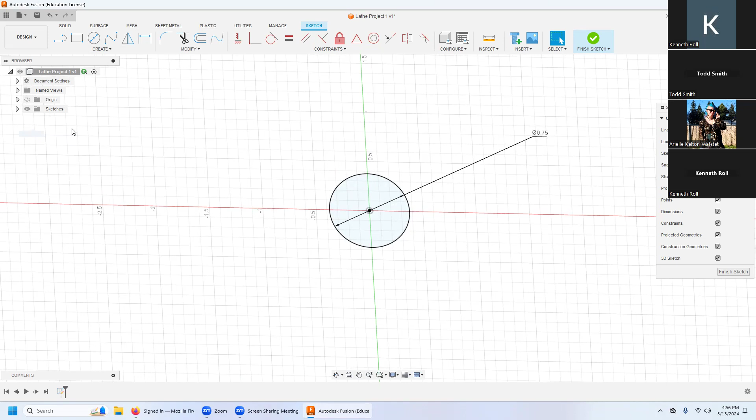Here we go. Okay, so everything is still basically the same. Do we want to go with a 1 inch or 3/4 top? 3/4 top. I will take that answer. All right, and then here we are. And that's going to be our stock diameter. So I might make that one construction. We'll see. Okay, and then I don't like looking down on it square oftentimes, so I tend to like to tip it, just to explain what I was doing there.

And I'm going to go over here and let's say we want to make sure that we turn some of the stock diameter, but we don't want to risk leaving mill scale and such. So I'm going to take some of that down. So if I take that down to a 0.725, that's going to leave about 13 thou per side to get turned on the lathe. That should be enough. Make your own decisions on that.

Okay, and then I'm going to extrude that a distance. I am feeling like an 1/8. So this is going to be the 0.125. This is going to be the flywheel essentially of the top. Okay, then from there, we're going to need something to hold on to for op 2. Op 2 generally has to be more delicate, more careful.

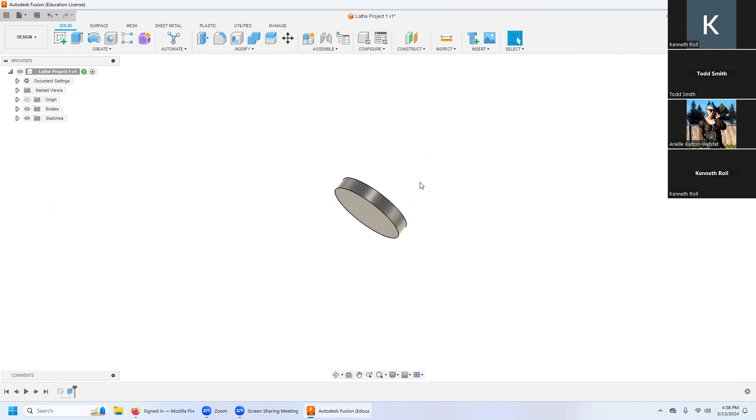So I'm inclined toward putting that grip on the spindle side, the part you grab and turn. So I'm going to say, let's create a sketch, and we're going to create that on the surface here. So that becomes my sketch plane. And I'm going to create a circle there. I'm going to tell it to be a 0.5

diameter. And then I'm going to come up to solids, and I'm going to extrude just that middle ring. I'm going to extrude that out. Let's stay with the 1/8 inch theme, see if we like that or no. There it is. Ta-da. And then I'm going to do it again. And this is going to be the spindle handle, whatever you want to call it.

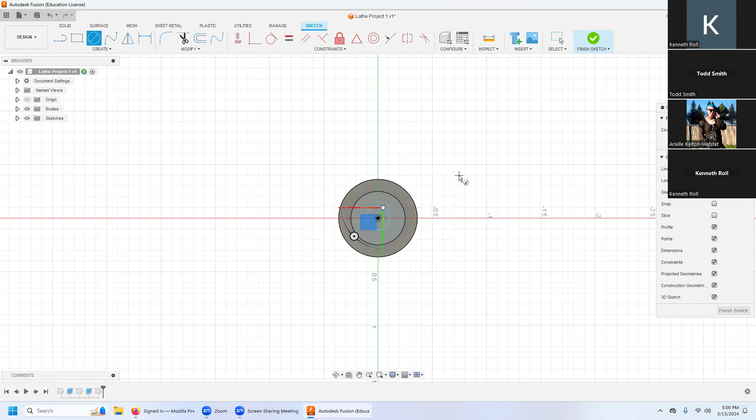And I tend to like when they are 100 thou diameter. But since we're kind of on a 1/8 inch theme, maybe we're going to keep that 1/8 inch. Sure, why not? And then we're going to extrude that out.

And let's look at a 1/2 inch. Sure, why not? We can make changes if we want. Okay, the part that actually touches the table. Let's do that.

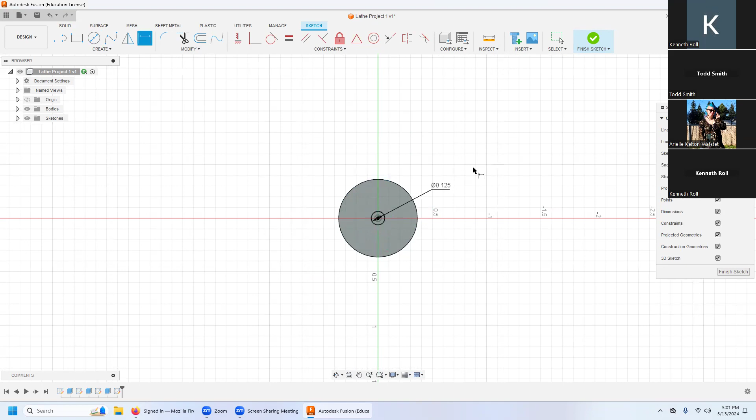There's lots of different ways we can do that. But since we're kind of on that extruding out theme, let's keep going there. So I'm gonna grab that one there. And let's say we're going to make another. All right, fine. Let's keep on the 1/4 inch. Keep going there. Sure. And now I'm going to extrude that out a distance. Let's say 1/4 inch. That might be too far. We'll find out. All right, so there's our basis.

So now we're going to start modifying that. We don't necessarily need to put in fillets down here, but I think oftentimes I like having one that's going to be slightly larger than the tool nose radius of my finish tool, so I can get a nicer finish there. Okay, so I'm going to come up here to fillet. And let's say we have that one and that one be, so we've got a 15 thou tool nose radius. So let's look at a 25 thou, see what that's going to look like. Yeah, okay, let's try that.

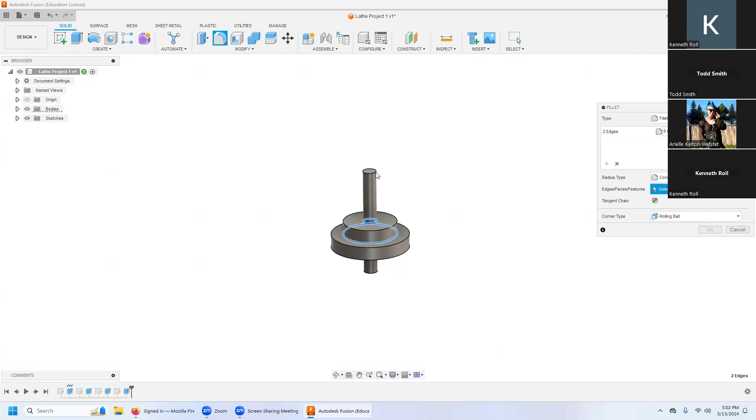And then I want a nice round top here. So let's make that a 0.0625. So it's going to be a sphere. But if we wanted a flat up there, we could shrink that to something, right? Make your own choices. But I think I'm going to go with the 0.0625. Okay. You know what? Maybe I'm going to press Control, and I'm going to add this one down here to do the same thing. So they both have the same round. Yeah, I like that. That's cool.

Okay. What's that? Control. So you can add to your different groupings. I don't know how to remove. Might be just double click on it. But press Control and you can add to these groupings. Selection set, I guess they're calling it. Yeah, I just learned about that.

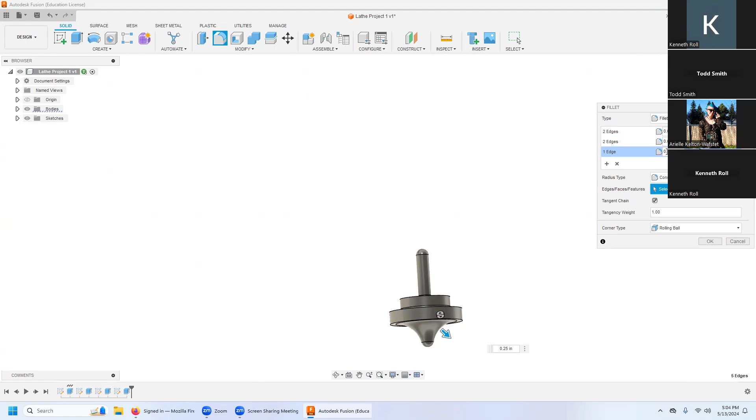Okay, I'm going to create a new one here just for elegance. And I'm going to experiment. What if we make that a 1/4 inch? See what that does. I kind of like that. Sure, why not? Give that. Oh, I have an idea. What if I select this whole face here instead of grabbing an edge? And I give that a 50 thou. I think I like the look of that.

And then I want to edge break up here on this edge. Maybe I actually want to make that 50 thou also. So I went back to that last face. I select Control and hold it. And then I grab this edge here. Let's see if that did not do it. Okay, fine. Okay, see what we did. Kind of hard to tell with all those lines.

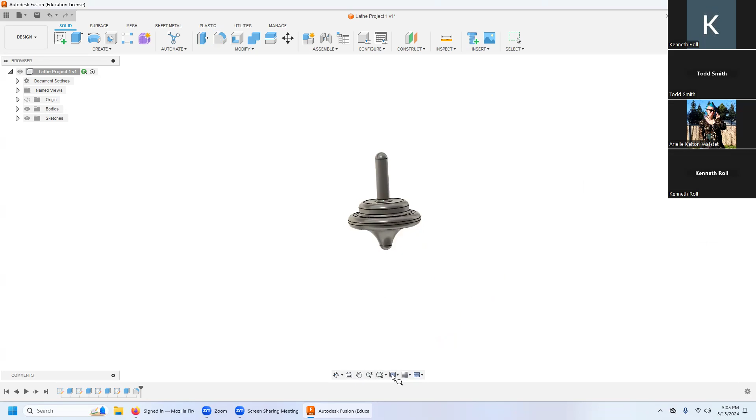Sometimes I like to go, not that one. Go over here into display. What are you doing? Go into display settings. Squirrels.

Go up here to display settings, go to visual style, change it to shaded. And I can go back to home and that'll take me back. There we go. And it's a little easier to see what it's going to look like in reality. That's not bad, but I think I want more sweep right here. Excellent. Well, since I designed those, that's not a surprise.

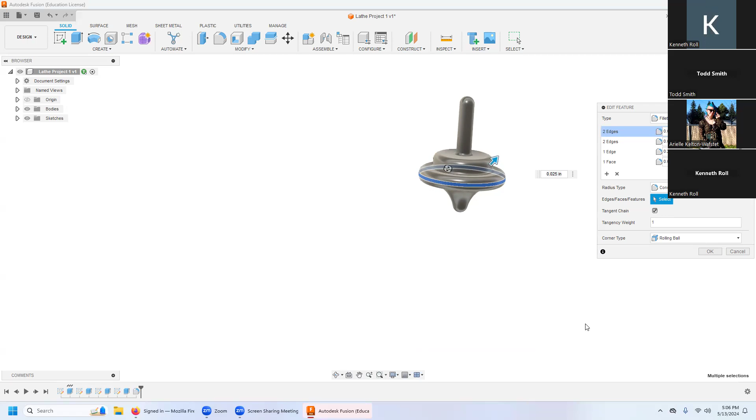Okay, so maybe I want to change that. So I'm going to go back to this one and edit features. And I'm going to find. Oh, right. That was this one here, wasn't it? Oh. Let's see, I'm gonna turn the lines back on. Get out of my way. Fusion, not Fusion, Zoom. There we go. Huh. Can I remove that one?

I can. Haha. Okay, so what I did was I highlighted one of the selection sets, pressed Control, and then I was able to remove an edge from that particular selection set. Neat. Okay, I'm gonna add something to that one, and let's make that instead an eighth of an inch. Ooh, I think I like that. Okay, there's my design. Ta-da! And that's very akin to what we've been doing up to now with how we built our forms for the mill. Any questions on that?

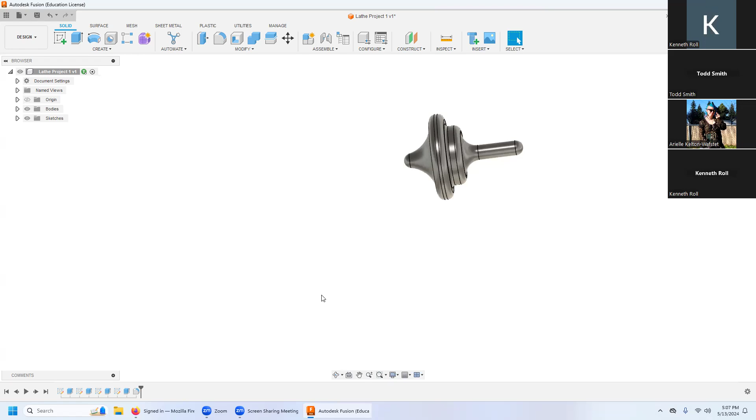Waiting to see if anyone is typing. I'm pretty sure I'll have some questions when I'm actually doing it, but I'm trying to watch so I can see, and yeah, I'll get stuck when I'm doing it. I totally understand that. Okay, well, I'm gonna save this where we are now. Boink.

And now it has gone to the folder that you guys all have access to. You can see it right there, so that you can open it up and look at it at home if you wish. And remember, down here, you have the timeline of how I went about it. So you can see that process. It's not the same as a video, but in some ways better, because you can look at it at each step of the way separately. I don't know. Make your own decisions. Okay.

Let's look at this another way. So I haven't been able to open up these files to follow those timelines and see how that was done. Really? I don't know what's going on, but I could see the files. I haven't been able to open them. Is anyone else? Maybe I haven't learned how to use Fusion all that well when it comes to moving files and all that other kind of stuff. Okay. I still have a lot to learn when it comes to that. Okay.

Well, let's call that the homework assignment for between now and Wednesday. I want everybody to try to get into the SEC Manufacturing 215 spring of 24 and see if you can open up these files. And if you can't, then we'll make that the lesson for Wednesday. I can get in there. I just don't know how to open them. Like I could click on them and... Weird. Yeah, I can open them. Okay, well, we'll have to figure that one out because that's important. Okay. I didn't realize that. I'm sorry, sir, that you had been struggling with it.

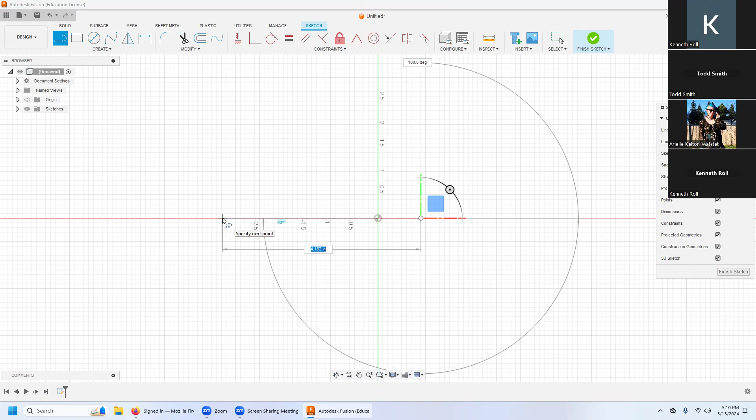Okay, so let's try another method for doing a very similar thing. I'm going to now create a sketch. All right, now, unlike usual, I'm going to grab line, and I'm going to grab center line. And from center line, I'm going to take that down along my X a ways more than I truly need. All right. You can make your own choices as to how you go about building this. I tend to like using rectangle myself. So I'm going to go there, bring this down a distance. I don't really care what it is right now.

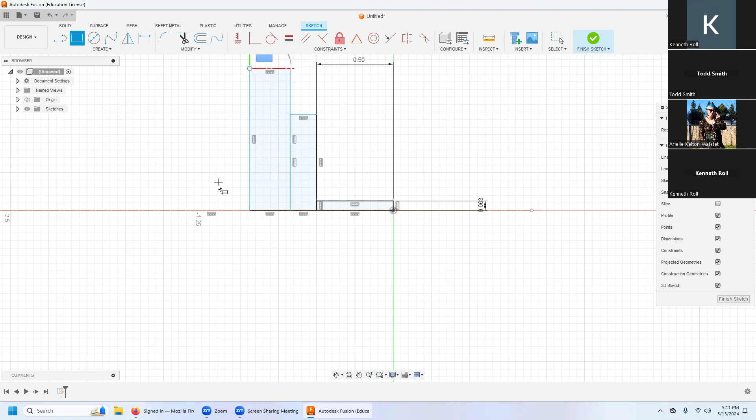And I'm going to say, all right, that is going to be 0.5 long. And this one is going to be 0.0625, which is a 16th, half of an eighth. Okay. There's going to be the flywheel. Oh, no, that's going to be the part we grab on for op 2. So here's going to be the flywheel. And here is going to be the tip. It's going to touch the ground.

Okay. So now I can say, all right, I want this to be 0.125. I want this to be the same. I want this to be 0.25. And then this one to be, well, we'd gone with a 0.725 earlier, and so I'm going to divide that by 2. There we are. This one was a 0.125. And let's go with a line that is construction, and it was 0.25 long.

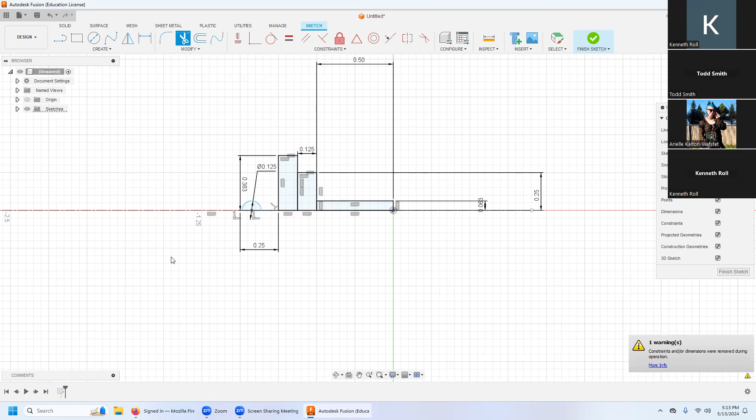So if I'd say coincident of, well, let's try something else. Let's drag this down to here and see if, oh, I know. I will trim that. So now I have a line endpoint. I can say I want this line endpoint to be coincident with this line endpoint. There we are. Okay, cool. Now, let's see. We were going to use fillet. And I'm going to put a fillet right there that is 0.0625. Oh, I don't want that to be construction. Try that again. There it is. Lovely.

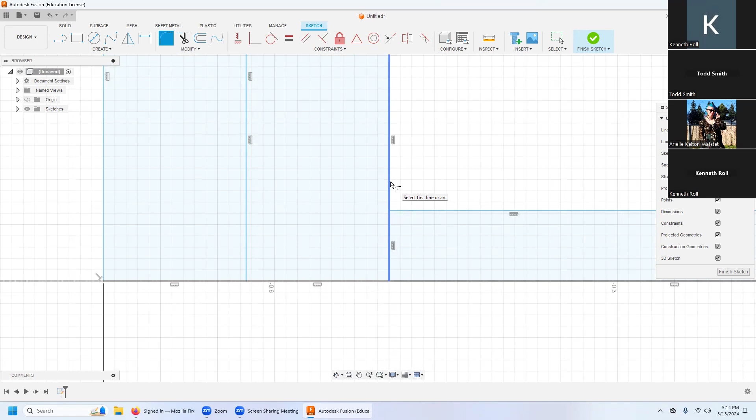And I had put a value in here that I don't recall. Oh, yes, I do. Oh, look at that. It's trying to do the wrong one, isn't it? I don't want that. Let's try grabbing that one and then this one. Aha, there we go. 0.125. There it is. And then I had, let me hit that enter. And then I had one between there, and that was it 25 thou? Anybody recall? Let's go with that anyway.

Okay. And then we had a couple 50s, as I recall. Tell me if I misremember anything along the way here, by the way, guys. That, and that were all 50 thou, I think. And then I needed something in here, a curve there. So I've got a couple different ways of doing that. But what I think is the easiest is if I just make a circle. And did I go with the 25 thou on that diameter? Yeah, let's look. Should have written that down.

Oh, well. So now I can drag that over so it's nearby. It's usually a good idea to drag it nearby because then it doesn't have to think as hard and make poor choices. Oh, no, it was a 25 thou or 250 thou radius. So that's going to be a 0.5. There we go. Okay, so I'm gonna get that nearby. And so now I hit escape a few times. I can go tangent. I say, I want this tangent to that, boink. And I want this tangent to that, boink. And I then start trimming.

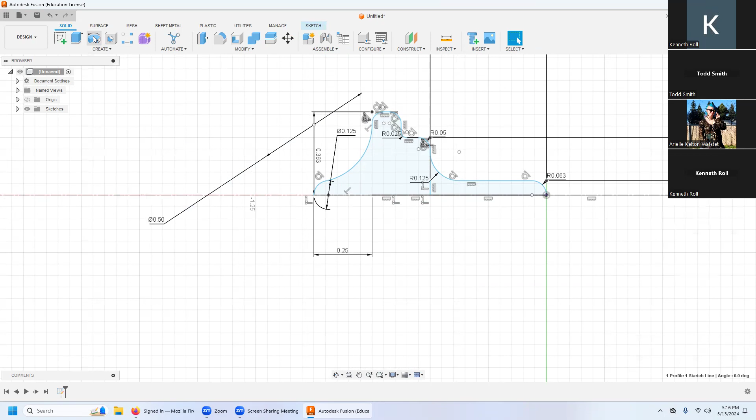Okay. Here we are. Now I can go over here to solid and go to revolve. And there we have the same top made in an entirely different way. Right? It does look shiny, doesn't it? Okay, let's save that.

And this is lathe 1.5. Lathe project 1.5. Save. Okay. So I'm going to come over here now and open up lathe project 1. See how I did for remembering those same values. Okay, looks pretty good.

So that's what Mr. Kenneth was talking about, of revolving it, of drawing half the project. Now, one of the things that had to happen, by the way, on 1.5, and now that's kind of interesting in terms of our timeline. I only have 2 points. I drew it and then revolved it. Now let's go back to that drawing.

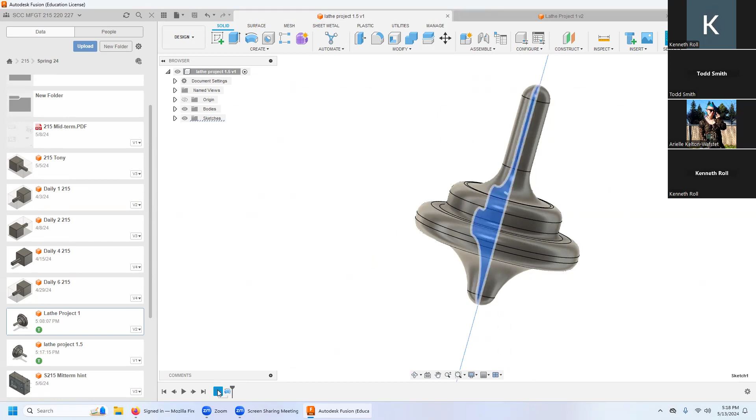Edit sketch. Now you see it's that light blue in here so that we know it's going to revolve properly. And that happens because I put that center line down first. You notice by getting rid of the center line, that's not blue anymore. I can't revolve it. And normally, I would have to have a line that goes from point to point.

But having just a vague center line, it understands, okay, this is what everything's going to be revolving around. And it has a better idea of what I want it to do. That's kind of vague, but did it make any sense? Little maybe? No? Okay, fair answer. Basically, it's got to have an axis around which it's going to revolve.

There it is. Okay. There it is. Okay. So those are saved and available to you guys. I want you to try to get in there and try to find them.

Arielle, do you have any questions on what you saw so far? No, I just have to try to do it myself before figuring if I have questions or not. That is so much truth right there. Just like Kenneth said, it makes sense right now, but then once you do it, oh, what?

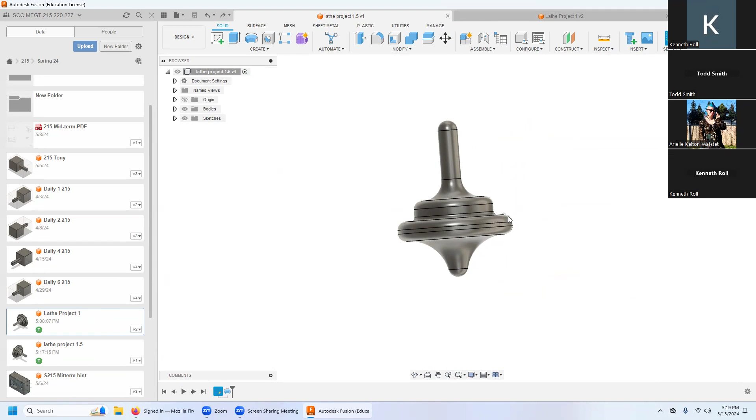Now, I am concerned about this design for 2 things. I did not leave it much flat space for the collet to hold on to for op 2. And this fillet down here might be too large. It might interfere with the collet and cause this to kick to non-concentricity. But I'm going to pretend everything's going to work out fine, and we can test it later if we want.

Okay, so from here then, let's talk actual CAM. All right. Now, happily, Fusion's lathe software is less weird than Mastercam's. Mastercam's lathe software is radically different than their milling software. I'm convinced they didn't make it. They bought it from someone else. Anyway.

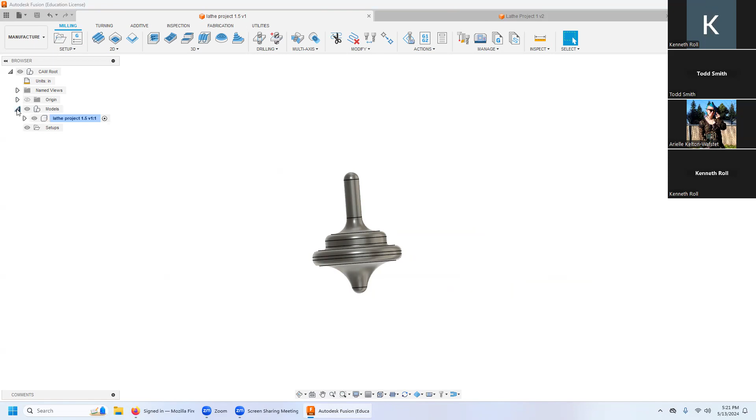So I'm going to go from design over here to manufacture. Here we are. There we go. All right, so first we need to do our setup. And for that process, I'm going to go to models. And I'm going to turn my sketch back on. Oh, this one didn't have that. That was on the other one. Well, let's see how it goes without the model like I usually like to make. All right, here we are.

So going to setup. Waiting patiently. There it is. Now starting out with the square stock, and that's fairly improbable on the lathe. So I'm going to come over here to stock, and I don't have my stock model this time. And sometimes I don't actually make a stock model for the lathe because I'm going to have a whole bar in the lathe behind it. And that can get a little weird in Op2. So make your own choices there.

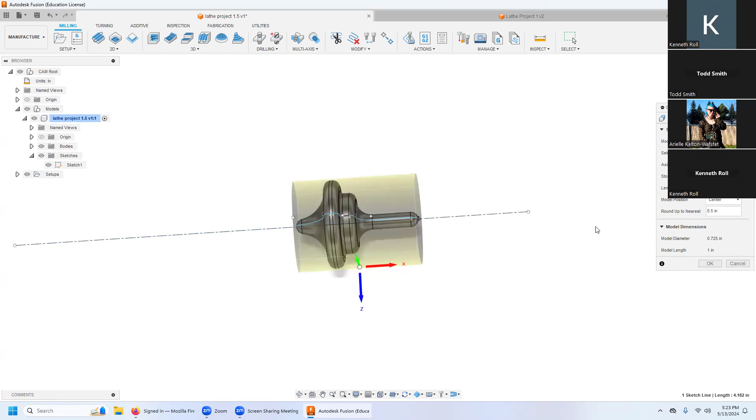Mode, I'm going to go with a fixed size cylinder. And I know my stock diameter is going to be a 0.75. And my length, oh, that's wrong. That's not quite right, is it? So let's select our axes. And remember that center line we had? Isn't that nice to have now? Okay, well, here we are.

But that's perfect stock, and that's a bit improbable, isn't it? So let's add a little bit to that length. Let's call it, oh, 1.25 inches. Now, we have it rounding up to the nearest 1/2 inch. So that might be excessive. Round up to the nearest quarter. There we go. Model position.

Well, it's dead center. That's not really what we want. Let's offset from front. Oh, wrong one. Offset from back. There we go. But we want some to face, so I'm going to give that 50 thou. 50 thou tends to be a good amount to face on the lathe, particularly if you're cutting steel. You can get away with less with non-ferrous materials. But remember, usually you're going to have run a part-off tool just before.

And part-off tools create so much heat. So there's a good chance that we have work hardened the face of the rest of our stock. So when you pull out for the next part, you want to make sure that you face off all that work hardened surface. So you want a good 50 thou to face if you're cutting steel.

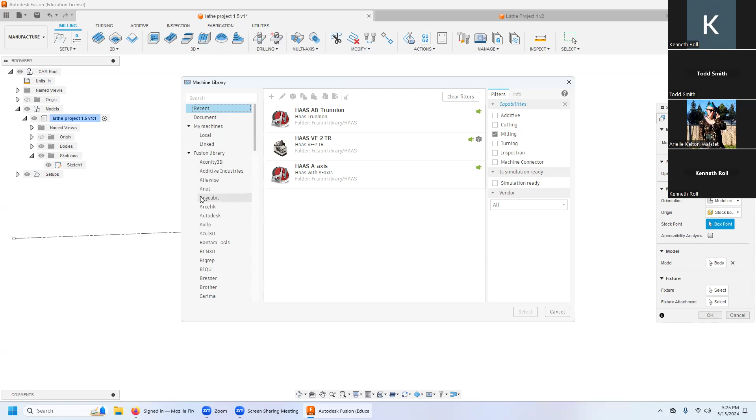Okay, now I'm going back to setup, and I'm going to select my machine. Okay, here's where it can get a little weird. I'm still learning this myself, so this may not go according to plan. I just want to prep you guys for this. So if I come down here to Haas, there is no lathe in here.

Oh, wait, okay, so I have it on milling. Let's try looking at turning, see if it's gonna show up now. No, it's not there. Okay. I don't know why they made this choice, because they have the lathe on their website. So why do they not include it? I don't know.

So let's see. How did I do that before? Let's try clearing the filters. Nope. Trying to remember how I did this. Oh, it was in something else. Right. So I'm going to cancel selecting the machine for now. I'm going to come back to it. I'm setting this up for turning.

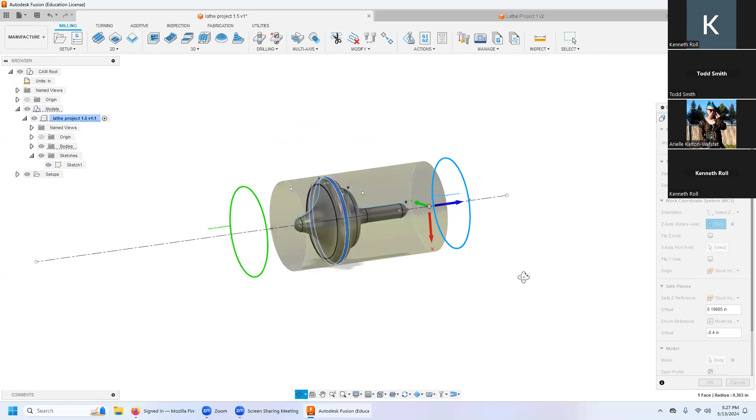Okay, so now here we are. I want my X positive lined up more with my drawing. Z is looking good. Because remember, we got orientation before we select location. Wait a minute, that jumped out forward. Let's go back to our stock. Offset from front. There we go. Much better. Okay, I want my X facing the other direction.

So X from point, and I think I have a flat line in here somewhere. There's one. Now it's parallel to that flat line. If I wanted to, I could flip it, but I'm not going to. All right. And Y doesn't really matter. The safe plane is way, way out there. That's kind of ridiculous. 100 thou is plenty. Some people just use 50 thou, but I think it's kind of scary.

You can set up your chuck reference here if you want. I don't usually bother. Make up your own mind. Okay. Now the spun profile can get weird here, and we're going to deal with it a little bit, but then address it more later. So I'm going to grab my body here and say, yep, that's it. There it is. And hopefully it will play nice. Doesn't always.

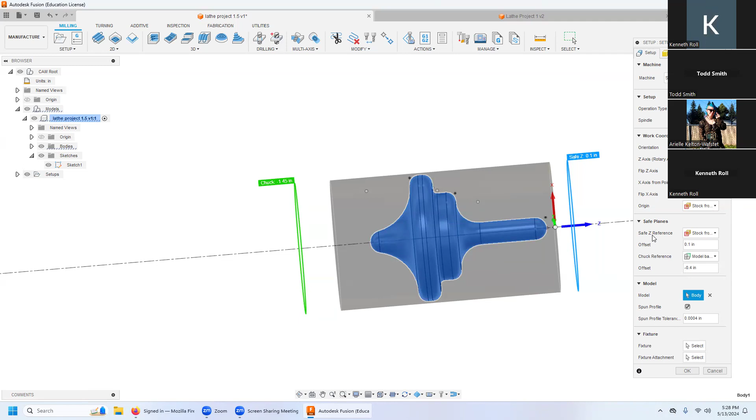Fusion library. Going down here to Haas. Going to turning. And there's nothing there. Interesting. Okay, let's try something else. Let's try going to the post library. And there's the ST10. I have done this before, and it can see it. But if it wasn't there, we would go Fusion library, vendor being Haas. There it is.

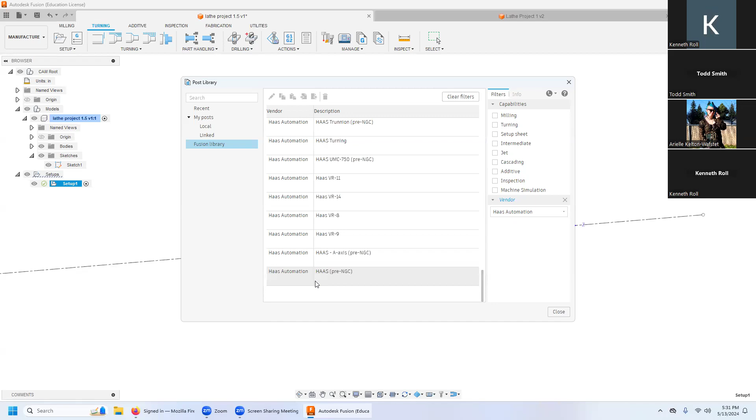Okay, so I go to the Haas Automation Fusion library, and here are all their Haas tools, and I see a Haas ST10. We also see some other ST10s with L and Y. L, I believe, is long. Y being it has an actual Y axis rather than a C axis for multi-axis tooling. We don't have one with a Y axis here. If you have any troubles, here we have the pre-NGCs for downloading if you have an old version. But for now, we're going to go a Haas ST10. I'm going to grab that.

And we're going to come up here to export. No, is that right? Can't be export. It should be import. Oh, it's because I already have it. Well, let's try export, see if that does anything interesting. Let's put that onto desktop. Save. It won't let me. Oh, it needs a file name. Well, this is not going to plan.

I think I should try doing this on someone else's account. Okay, I'm gonna try doing this later. I'm gonna make a false account so we can go through it there, because as I recall, after I had selected it, this right here became available and I was able to load it up.

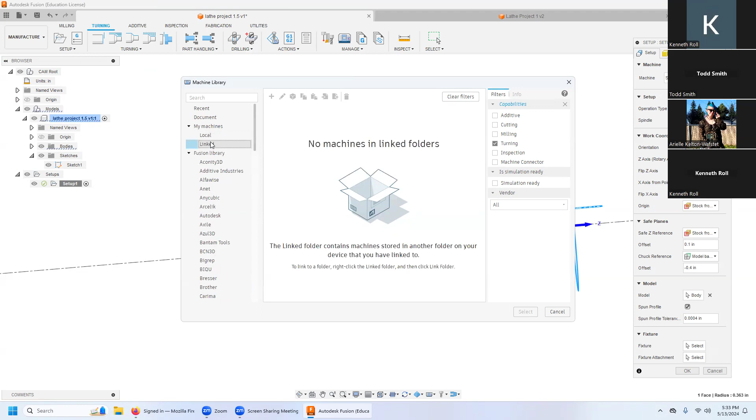Okay, interesting. Let's import that. No, I don't want that. I am so confused right now. Yeah, it's not behaving the way it did in the past. Did go through that there, though. Let's go back and edit this. Is it going to let me now? Be nice. Import. My computer. Fusion 360. Nope. Not it.

Nope. Okay, well, let's cancel out of that. Clearly, I need to do more exploring because I got this to work on a different computer, but obviously I lacked some of the understanding that I thought I had. That's okay. We can do everything else.

You know, I think Fusion does that, at least with the version that communicates through the cloud or whatever. Yeah. Sometimes something works, and then all of a sudden the same thing didn't work. You are 100% correct. You could try it for an hour over and over, and finally the same thing you've been trying finally works again. Yes, I have found the same thing. And usually when I can tell that it's not me, then I shut the computer down, go get a sandwich, come back. Sometimes I found that works pretty good.

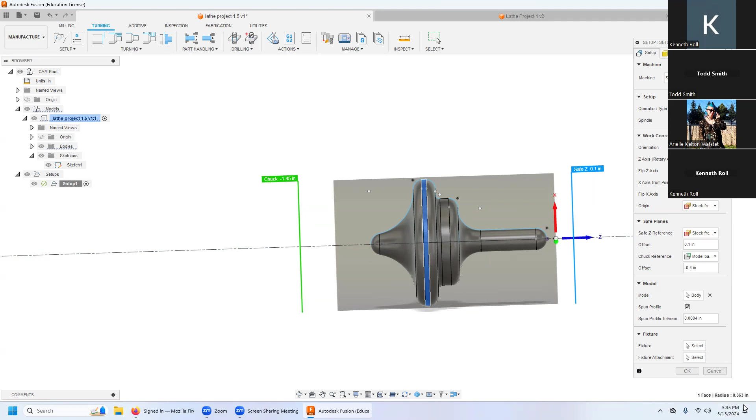Okay. Well, all of that aside, at least we have stock. We have a profile and we have a model. Now, honestly, I tend to prefer the profile method for the lathe. So let's go look at some things though. First off, we're going to face. That's always going to be your first, unless you have a very good reason. That's going to be your first tool path.

All right. We're going to select a tool. And we're going to come to turning tools, imperial or inch. Now we see that little spinning down here, calculating spun profile. So what it's doing is that it is looking at the solid that we made and trying to understand what that would look like on the lathe. And sometimes it gets it wrong. We're going to look at some stuff.

Okay, grabbing turning tools. And I want turning general. And I can't see the names very well here. I mean, okay, great. I've got the codes, but who knows what the hell those mean. So I'm going to come up here and once you get the double arrow there, Duke, I can slide that over. Yeah. And we want right-handed tools. Don't get yourself all confused trying to overthink it. Just telling you now, right-hand tool. What's that?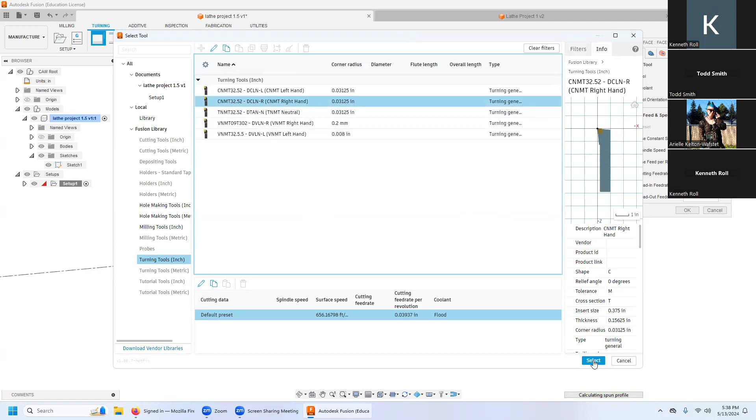Uh-huh. Okay, so amongst those, our roughing tools are going to be in the 30 thou range. Now you notice it's not exactly 30 thou. That's because it's actually a 30-second, which comes to that value right there. Okay, grabbing that, I'm going to select, and I shouldn't need to modify the tool at all. And it already gives me something pretty decent right from the start, right? Okay, so we're going to make some small changes.

Now, feed and speed. Well, can we come back to that? Let's come back to that later. One thing I do know is your feed per revolution. A good ballpark is going to be 10 thou per rev. But we're probably going to change it once we do a little bit of research. But I'm going to start there. That's going to be a decent, safe ballpark.

Your feed rate per rev for roughing is based on your material. Your feed rate per rev for your finish is based on your tool nose radius, slightly modified by your material. We're going to talk about that more later.

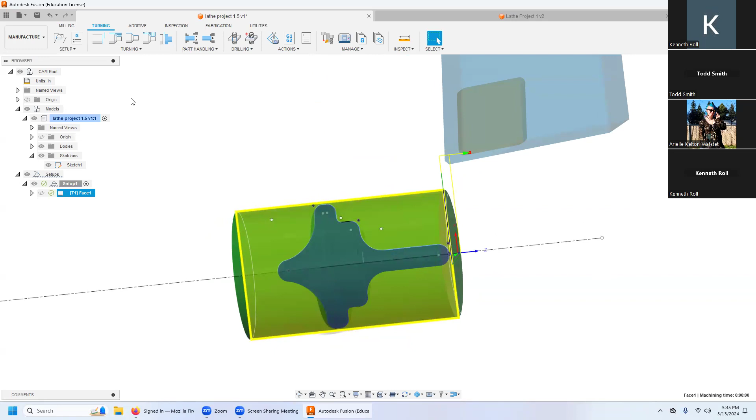Okay, so now let's bounce over here up to turning, and we're going to grab turning profile roughing. Same tool. And happily, it grabbed the value we had put in on the facing, that 10 thou. That's a nice little convenience. Keep it in feed per rev, please. I'm going to bring that down to the 4 thou so we don't just wind the crap out of it. Okay.

Geometry. For roughing, I like using cutting edge rather than contact point because contact point can feed in too deep for roughing. So I'm gonna leave cutting edge. Groove suppression can be important. I'm gonna leave it off for now, and you guys will see why. Let's go over here, and okay, same thing. So inner radius is gonna be the cutting edge. Distance below cut, we don't need to because we already did that.

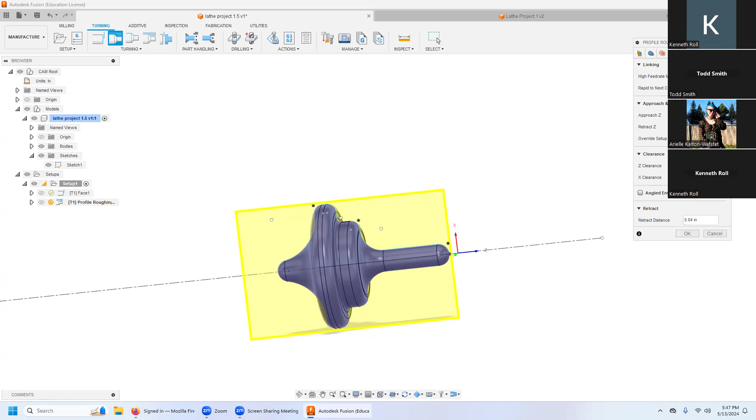Stock to leave. You want 10 thou radial and 10 thou in Z. I'm going to leave off extend to stock and we're going to see what happens. Sometimes it needs it, sometimes it doesn't. It varies depending on the shape of your part. Linking. Okay. Before we mess with it, let's leave it alone and see what happens, and we can come back and change if we need. Let's run that. Here we go.

Okay. So things turned out pretty good. Doesn't have a lot of lead in. I don't like that. I think I'd like more out in the front. And it's trying to cut this groove down in here, but it can't because of the rest of the tool. So it's trying to protect that. So let's help it out a little bit. I'm going to run this first to see what it's going to do though.

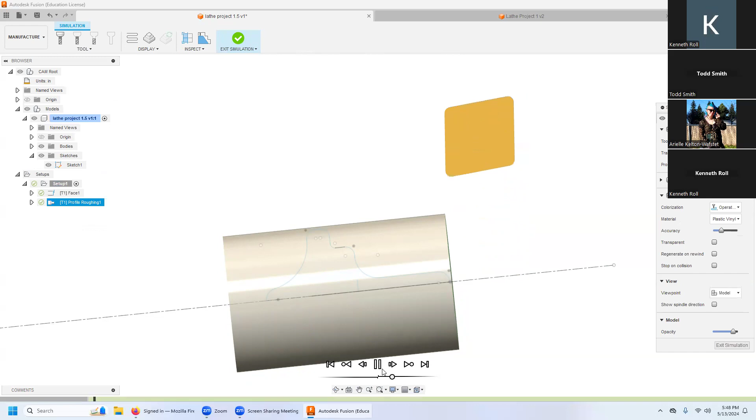Yeah, let's do that again, slow it down. Generally looks pretty good, but zoom face. It's going to come in. Look how close that is. Ooh, I don't like that. I mean, it should be perfectly fine, but that can get a little scary for my operator, and adding another 50 thou won't hurt anyone's feelings.

Okay. Also, we should go look and see what the step down is. It defaulted to something pretty good, it looks like, though. Okay, we have some changes to make. I do recommend running it before you make all the changes so you don't try to over control it. Fusion doesn't like that. So you need to know what to edit and what to leave alone.

Yeah. When you're tapering down on the backside, what I'm seeing is the clearance on the backside of that cutter is becoming less and less. Yes. So we're not going to do that. We're going to get rid of it. But it feels like it could be just fine, but maybe.

Sorry, man, I can't hear you. I mean, it looked like it was fine too. I still can't hear you. Oh, you can't hear me? No. Oh, I was just saying I thought it would be fine, except maybe I wanted to see what you had to say about it.

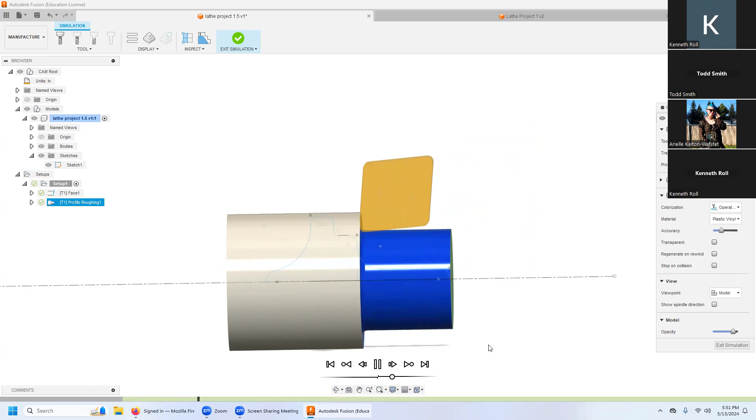Let's see. Grooving. For the roughing, oftentimes I just turn off grooving entirely. Pow. Okay, so I made 2 changes. Let's see what that's going to do. Okay, look at that. That's going to be nice and aggressive. Let's go get a peek. There we go. And we go face. Pow. Ooh, there's a cut. Mm-hmm. All right.

Okay, I like that. Now, however, I like to have my roughing go back to about the front face of my part off tool, because that will give an edge for my operator to discern if they're in the right place. Also, it helps remove the potential for razor blades. Yeah. Okay, so let's go back in there. Let's edit. And let's see, where was that living? Trying to remember. That extend to stock.

Trying to remember. There it is. So it's gonna be that one right there. Model back. Then I'm going to offset that by 50 thou to leave some to face on op 2, plus 1/8 of an inch, 0.125. So we're looking at somewhere between 155 to 175.

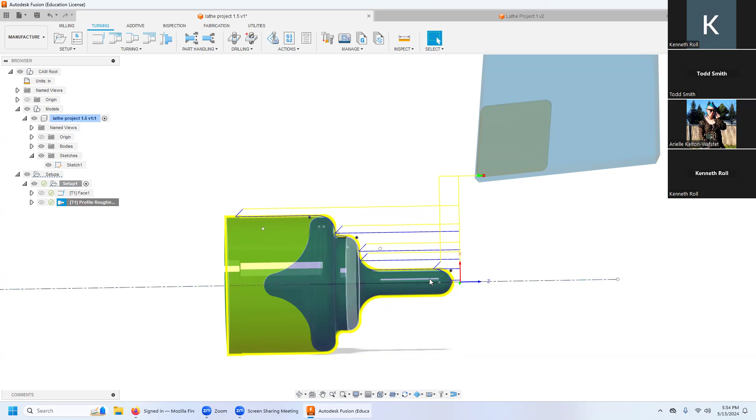Okay. So now, oh, I know what I was going to do. I was going to give it more of a lead in the front. I almost forgot. Go back to our geometry and model front. We're going to offset that by 50 thou. There we go. So did you guys see where I made those modifications? That was in geometry. And we can change where it comes in and where it leaves here. Okay. All right. I like it.

Now we're going to face again. Now, some people don't like to with the finishing tool. They just want to come in the middle and go. I've done that myself in the past. But I think I may have converted over back to facing with the finish tool. So we're going to go back there and go select. Now there's a strange thing that happened and I don't understand it. We're going to go turning general here.

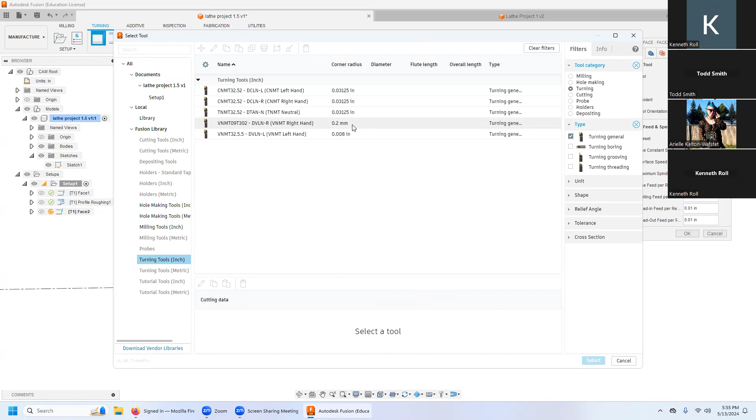For some reason, the finish tool is in metric. And I don't know why. We're going to select that anyway. Give it a right click. And then we're going to go back in. And now we're going to right click and edit. And we're going to go to insert. We're going to change our units to inches. And that corner radius here, I can go to custom dropdown and find,

so what we have there is a 15 thou tool nose radius. And I believe that's a 64th. Let's make sure. One divided by 64 is about a 15 thou tool nose radius. That'll do. Okay.

But it gets super confused up here. I don't know what that code is. I don't know what to put in there. But I am going to say that description is a 35 degree with a 15 thou tool nose radius.

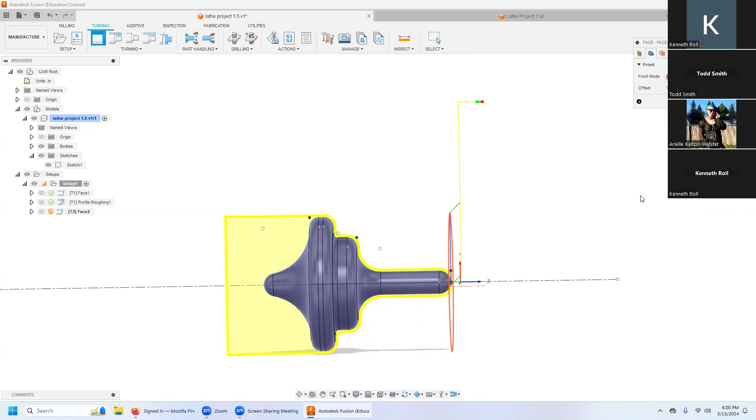Okay. The rest of that looks pretty good there. Geometry, model front. Yeah, we want that just directly on the front of that model. Radii. Okay, we're just facing here. Now you got to make a judgment call. Are you going to try to save time and have it just face, knowing that you have already roughed? And so you could bring that down to your part, maybe just a little bit outside, bring your retract and so forth,

to save time? Or are you going to leave it out at your stock diameter like we did for the roughing, just in case someone tries to run their finish without running their roughing? Depends on the kind of shop you're in and what kind of a doofus you're dealing with. You never know. So I'm not going to advise you here. When I am coding for students, I code for the outside of the stock and let it air pass. So it's safer. Make your own choices.

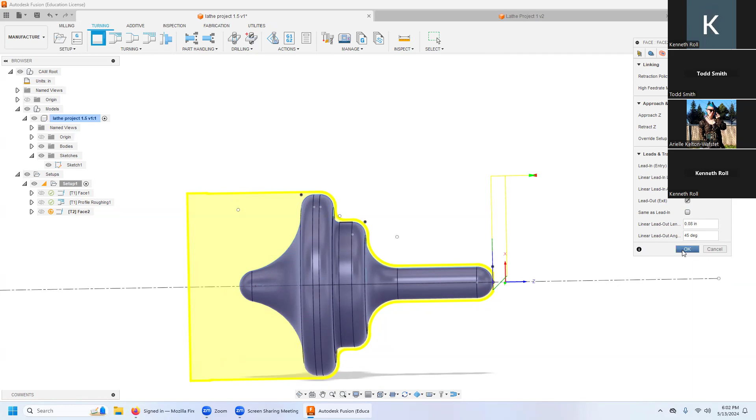Okay, I'm going to cut below that face by 0.016, just a little bit past the center of rotation. Well, that looks fine there. Yeah, that all looks fine too. I'm going to change my linking; it is not going to lead in the same as my lead out. I'm going to change my lead out to 90 degrees. There we go. Now, again, this is potentially super crashy. Is this a good choice? I don't know. You're gonna make the boss happy as long as it doesn't crash. Okay, there we go. Zorch.

Then I'm gonna go to turning, and you'll see why I like having that outline there that we had done earlier, that light blue line. Okay, so it grabbed all of previous for that tool. That's handy. Turning mode is outside profiling. Yes, please. No, we're not using a tailstock. We don't have one. Okay. So it's at model front, and I'm going to offset that by that 50 thou. I'm more comfortable when it starts out there. Back is going to be the same value we had before, negative 1.205. And for the finish tool, I like to go from contact point.

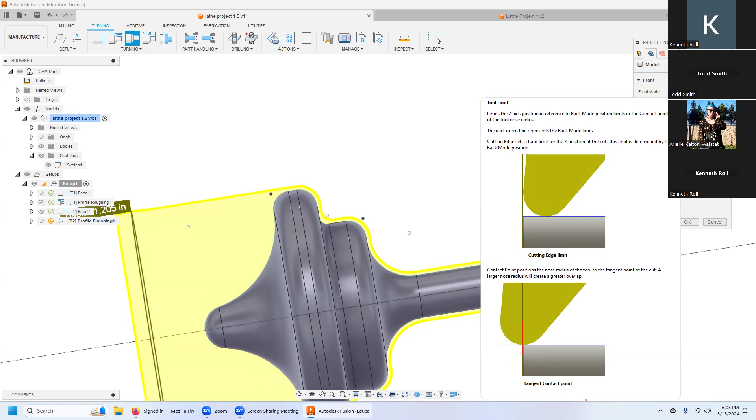Okay. Groove suppression, we might have to end up using. We'll see. I'll try to avoid it personally. Clearance. Okay. Inner radius is 0, outer radius being the stock. Your clearance, we don't need 5 miles out there. Let's bring that in to 200 thou. Passes. Okay, let's talk about spring passes here.

On the lathe, unless we are threading, we want to avoid spring passes. So sometimes that means step turning, and we're going to talk about that later in the term. Sometimes that means using a tailstock, which we don't have. Well, actually, we do have one on one of our TL1s. So we'll talk about that one and its safety later. All right.

So I only want one step over. It doesn't really matter what that value is because we already left it with 10 thou all the way around. Grooving. I don't want it to try to cut down in here. So let's say allow axial grooving, even though it doesn't really matter because we don't have an axial groove anyway. Okay. So far, that looks just fine and dandy, but let's look at it before we start making changes. I think I'm gonna have to make some though. Okay. Looking largely pretty good.

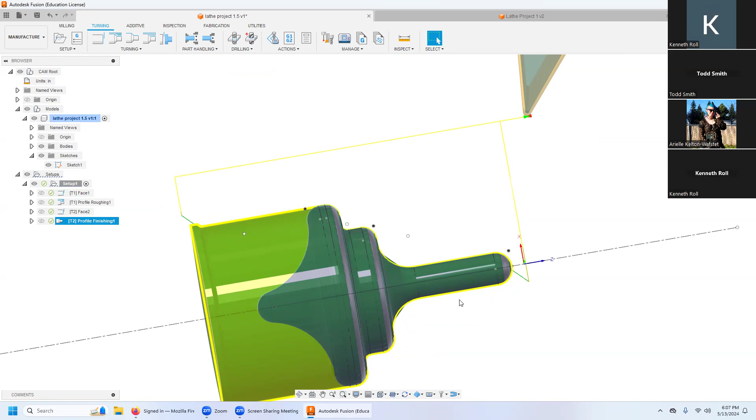I don't love an angled lead in. There's an argument for getting a better finish that way. Also, look at that. What's going on here? That's not matching our design, is it? So that's part of the whole, it's calculating based on the model rather than the line, and sometimes it calculates wrong. Well, let's make a couple changes and then come back to that one.

So I'm gonna go to edit and let's deal with the first problem, that being that lead out. I don't like it that way. It's dangerous. So I'm gonna lead out at a 90. I don't want it to lead in at 90. So let's try a 0, I think, if I remember right. That's allowed lead to cut stock. Okay. Lead in length of 80 thou. That's kind of a strange number to me. I like rounding it. You don't have to.

Lead in radius is at a 0 at the moment. Putting a radius on there isn't a bad idea if you're trying to blend cuts. Okay. Oh, that number's wrong. Let's go back and change that. Apparently that's supposed to be a, let's see. Lead in angle 90. Let's try a 0. Lead in 90. Lead out 90. Changes to 0. Nope. That is weird. Okay.

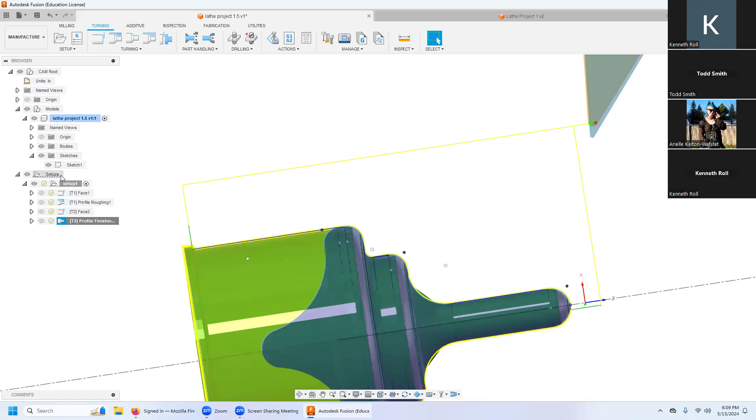Okay. All right. That's looking better, but we have some flaws in our toolpath. Let's run it and see what we get. Zoink. Yeah, we're hogging in nice. That's going to throw some chips. We're probably going to be doing some coolant evaporating on that. It's going to get so hot, the coolant's going to vaporize. Aggressive evaporation, yes.

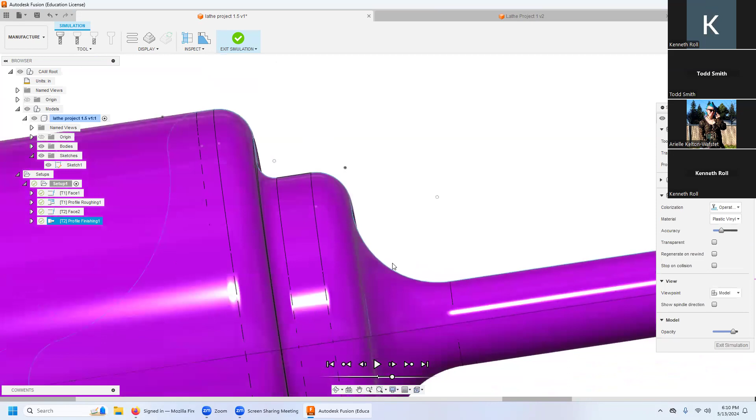Okay, so happily, the approximation we were seeing earlier was just that, an approximation, and in reality, it is matching our profile correctly. Hooray. It doesn't always do that. If it is doing it badly, we can go into edit. I've had to do this, where was that? I had to go into model and then grab chain, open chain, and then grab each one of those little lines around there and so forth.

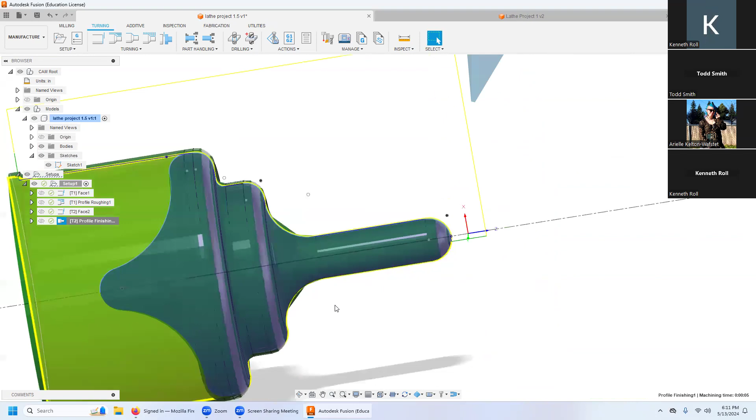So if it's giving you a bad interpretation of your part profile, if you have a profile line, you can use that to fix the problem. But it's giving us a good one, and so I'm just going to let that go. Okay. Lastly, we're going to go, oh, not lastly. We're actually going to have a problem on this, probably.

On this roughing, everything's going to be fine until it hits right here. When it tries to go around that curve with a step that large, there is a solid chance that it will bend this spindle if it's too narrow. 1/8 of an inch might be strong enough. It might not. So what we can do is we can go profile roughing. We had everything that we liked on that.

So we're going to select it, right click, duplicate, then go to the one above, edit, go to geometry, drag this line up to here, and then back that offset. Actually, why don't we go instead to selection, select that line, change my offset to a negative 0.05. So it's going to cut that nubbin first, because this curve right in here is where it's going to cause the bend.

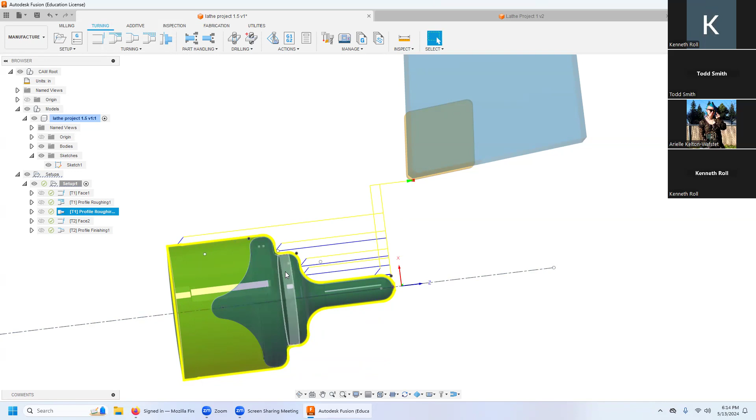Okay, now we could just part this off as it is and then leave this chunk here for op2. However, we're not going to be holding it by much on that op2, and I don't want to lose a ton of time. So I'd rather take some nice, big, aggressive cuts on op1 where I can. So I'm going to come up here to grooving, turning groove, bonk.

I'm going to select turning tools, and we're going to go turning grooving. And we have a 0.125 width. And I can't tell from here which is what. So I'm just going to grab one, see if it looks close.

It's got a button there. That's not the one. That's not what we have. So let's try something else. I'm going to delete that tool. And so it gave me that warning: if you delete it, it's gone forever. No, it's okay. See, there it is. Let's try this one. There we go. That looks a lot like ours.

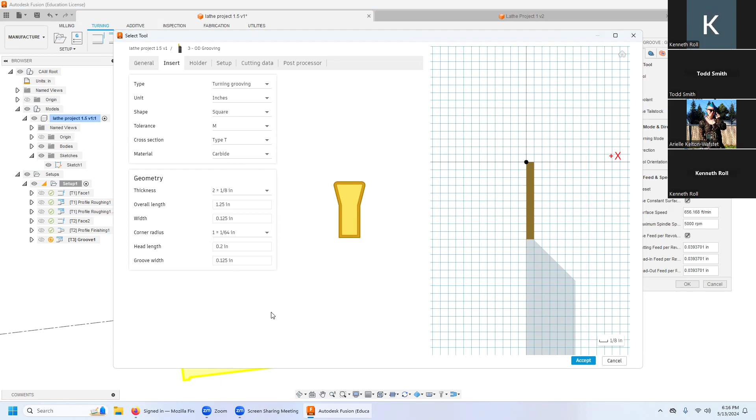So we're going to go back in now. Edit the tool, going to the insert. Okay. So our overall width, that's length, sorry. Our width is 0.125, but they're talking about back here. I think our groove width here is a 0.125, if I remember correctly. All right. Corner radius is a 64th. I feel better about all this. We should measure our tools, though, to be certain.

Grooving, right, 0.125 width. All right. Gonna accept that one. Select that. There we go. I like it. Okay. Now, generally for me, I get concerned with grooving because it's rubbing on three sides and has a very large surface. So I tend to drop my surface feet per minute by about half. So if I go like a 400, I'm feeling more comfortable there.

Do what you like. My cutting feed per rev, I turn that way on down to like 6 thou per rev or less. Sometimes for my part off, I'll drop it down to a 2 thou. But I'm not parting off, I'm roughing. So I think I will be safe at a 6 thou, right in between the rough and the finish. Okay. I don't want to groove the whole thing. I'm just doing that back. So I'm going to go with selection and I'm going to select that line there. That's fairly convenient. Back, model back, that's fine.

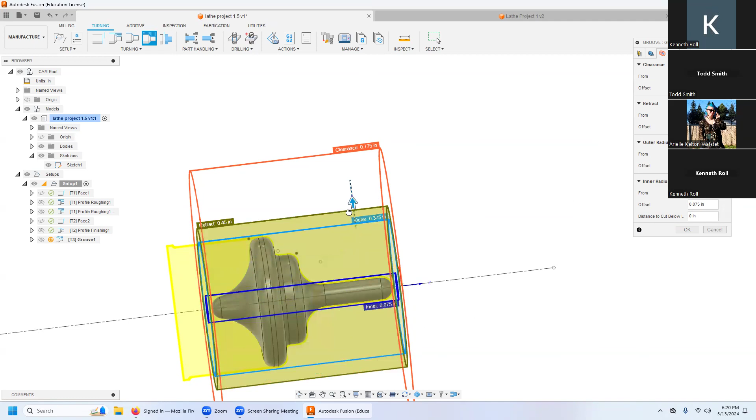Outer radius stock, retract. Oh, it's all the way out to clearance. Let's go with stock and bump that out by 100 thou. Do that right? I did not. It's the wrong one. What? Something is goofy. I retract out to there. There we go. And then my clearance. So what I'm showing you here is you don't have to put in the exact numbers. Sometimes you can just drag it to what seems reasonable. Right? Okay.

So let's see here. I don't want to allow a rapid retract. I don't believe compensation type is in computer. 40 thou back off. I do want a finishing pass, just one of them. And I want that step over to be, let's give it like a 20 thou. Okay, roughing passes. I tend to like full step down myself. You should experiment with what you like. Step over of a 40 thou is too small, in my opinion. So if it's a 1/8 of an inch across, let's see what like a 75 looks like.

Because of the nature of all that pressure, sometimes I like pecking in there better. It defaulted to 400 thou. That seems a bit much. Let's see what 100 thou does. Stock to leave. I don't want to finish with this tool, even though I said finish earlier. We're going to do that in op 2. So we're going to leave a radial stock of 10 or 20 thou. I'm going to go with 10. And an axial also of 10. Okay. I'm going to leave all this alone until I see what it actually does.

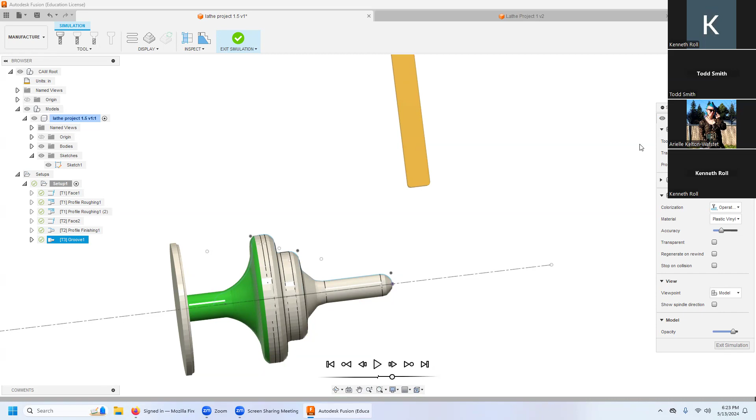Let's exit that simulation there. I'm pretty happy with what that did. So I'm going to come up here and part off. Same tool, but I'm going to drop that part off to, well, let's leave it a 6. If you don't have a parts catch... so we have on the ST10 a basket that swings out, that if you turn it on, can swing out, grab the part, and you can just pick the part up outside without opening the door and without going swimming in the razor blade soup. Yeah. The TL1s do not have that feature.

If you are making parts and every second counts, then you're probably going to want to find another answer. But if you're on, say, that TL1 and you're only making 20 parts, 5 parts, then instead of parting all the way down, I find it sensible to part most of the way and keep from knocking this part off. And so then the operator can reach in and snap it off. That way, again, they don't have to go hunting.

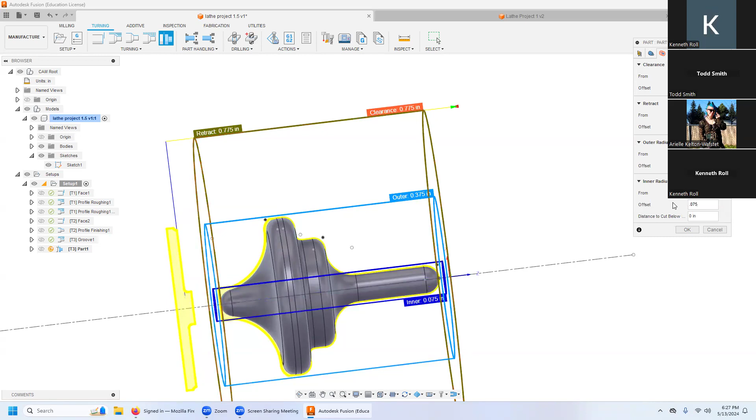So my inner radius, I'm gonna offset that. Again, it's radius, so somewhere between 50 and 75, kind of depending on material. I'm gonna go with a 75 on this. No, I'm not. That's way too much. Let's drop that down to a 30. Yeah, it's gonna give us a 60 thou diameter. I think that'll be okay.

Outer radius stock, fine. Retract should be outer radius plus 100 thou. And our clearance should be our retract plus 100 thou. So we're coming in relatively close to our stock, but it's going to start 100 thou out. Should be fine there. Passes. I want to use pecking. I like pecking, you don't have to. Pecking depth is a bit much there. I guess on this one I wouldn't need to because all that material is mostly gone, so I'm gonna turn that off this time.

I do not allow rapid retract here. I'm contacting material. I'm not a fan. I know of other professionals that do whip right out of there. Make your own choices. Stock to leave, I want that to be a 30 thou. Oh, it's not updating. Let's turn that off and see what actually happens. There we go. So I had left the 10 thou on that other feature, so I didn't need to double up. You can see it's going to leave a little bit there. I might need to leave more.

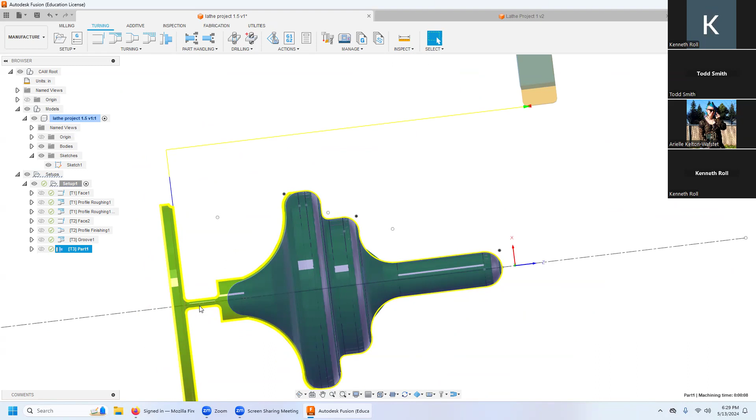That's a good opportunity for going down with a setup person and say, is this popping off or is it staying on the stock? Let's look at this one. Now, look at that machining time. Less than a minute and a half, not counting tool changes and rapids. That is profit. That is money, especially since we bulked off most of op 2. We might even be able to skip the roughing pass. That is groovy stuff here, guys, I'm telling you. Okay, let's run it. Doink.

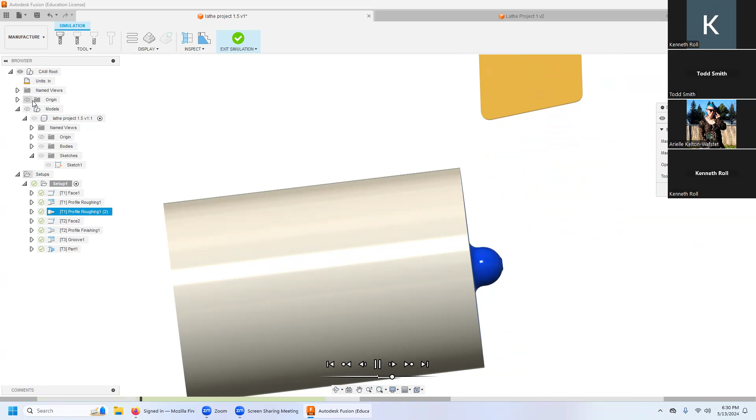So even with the extra tool path to get that nubbin, we're making good profit. So then you sell this top at 25 bucks a piece, and the material costs you 50 cents each. That's step 3, profit. Right?

For those of you who watched South Park. Oh, the step 3 profit is from South Park. Yeah. Terrible, terrible show. Timmy. Okay. Terrible, terrible human.

All right, there we go. Nice. Now, having those 2 passes in there, I don't know, but I think I like it.

There. That might be a little too skinny. We might need more meat on it. We might need up closer to like 100 thou diameter for that snap off. But all in all, I'm feeling pretty good about all of that.

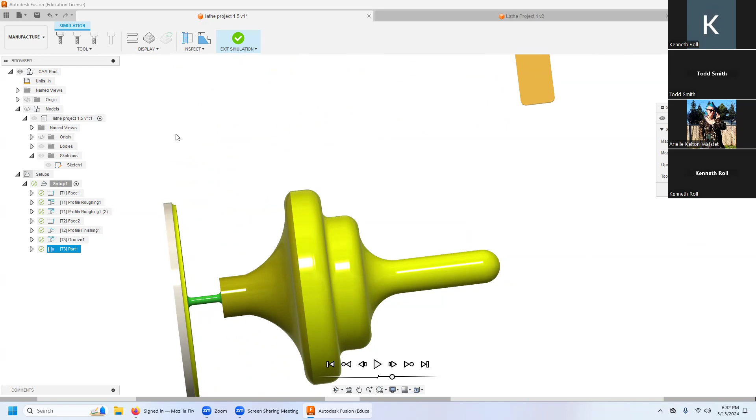Gonna exit that simulation. Okay, now up to going into setup. Oh, I'm gonna turn my models back on. And my stock, my mode is from preceding setup. And I'm going to continue rest machining, so it doesn't try to cut what's already been cut.

Going back over to setup, we know that it's turning. We want our rotary axis to be this center line there. Very good. Let's flip this around here. And our X is just fine. Let's try leaving all this for now and see what happens.

Post-process. Well, that's not going to work out very well because I'm going to have two programs with the same code here with the 5, 13, 24. So I'm probably going to need to choose a different style of that if I'm going to do multiple programs in a day. Oh, well, so I'm just going to call this one 02. Poor choice. Oh, well. So here we are.

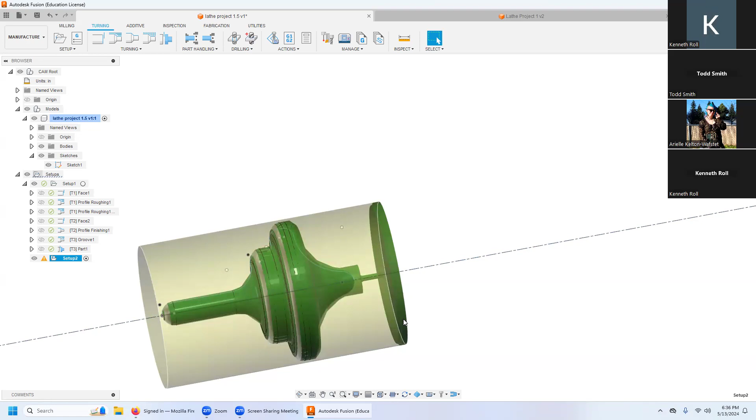Okay, so this stuff isn't here, and so it's gonna register crashes. We're just gonna ignore that part. Okay, and where is my WCS? It is all the way out there. That is not what I want. Let's change that. Why are you doing that to me? Setup. Let's go. Oh, because I had selected that as the rotary, I think.

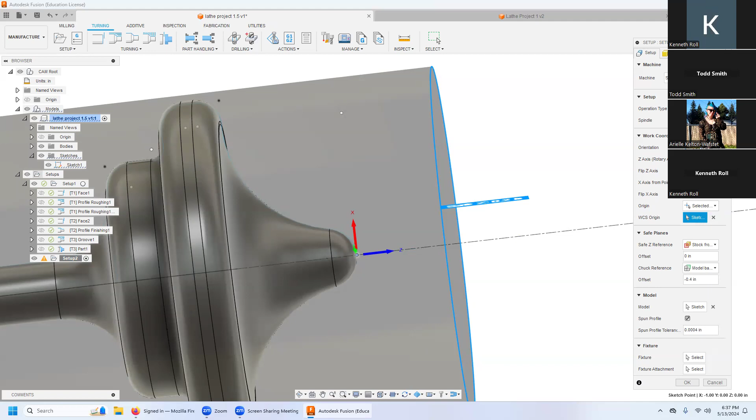So x-axis from that point? Nope. From selected point. There we go. That's what I want. Okay, so touch off then is going to have to go in the setup sheet, that they need to touch off on the front of the part and inset by negative 30 thou. Right? Okay.

Well, I still have a little bit I need to rough, so I'm going to use that roughing tool. I liked the idea of not, but I'm going to. So what I'm going to do is I'm going to be lazy. I've already set that tool up correctly. So I'm going to select it, and then I'm going to duplicate. There it is. I'm going to select that face 2. I'm going to drag it down and drop it into setup 2. And then open that up, and there it is.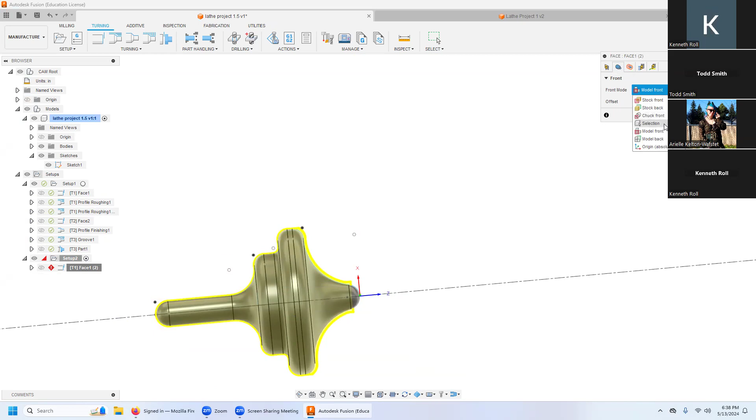So I'm going to have to make some changes. We're going to go in here and edit. We're going to move this over here. There we go. All that stuff stayed the same. My geometry, I'm going to say selection from there. Still with 10 thou. Good. Radii. Everything else should be the same. Let's see how it goes. Failed to generate. Well, fine. That was not going to be my friend. I don't want to fight with it, so I'm just going to go back to turning face.

Let's drop that down to a 6 thou there. Actually, no, let's keep that 10. Not taking that much. I don't remember what our SFM from before was. It was 600 something. So I do need to go back and check that research, make sure we get that right. Oh, we got a groove tool. That was the problem. No, it would have been a different problem. Oh, well, doesn't matter. There we are. Okay. That's looking better.

Front, and we're going to offset that by 10 thou. Radii. Okay. I don't necessarily need it facing the whole thing because that's already been done. Set my retract to there. This one to there. Sure, why not? Okay. That all looks fine. I want to change, so it's not the same as my lead in. Lead out and lead in are different. My lead in is going to be a 90, so I get no surprises.

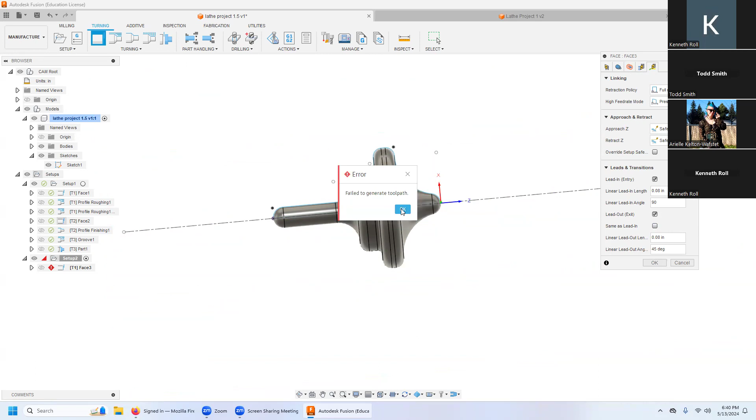Failed to generate toolpath. Why? And it crashed. No, it didn't crash. What is going on? I'm going to save it right now because something is getting weird. So it does not like my setup. It is angry. Let's go find out why. Why are you displeased with me?

Orientation. Which I model orientation. Nope. It's in X. I want Z to be parallel to this line here. Nope, not you. I want Z to be parallel to that line there. And I'm going to flip my Z. Everything looks fine there. Origin is what is selected. But my Z is offset. I don't like that.

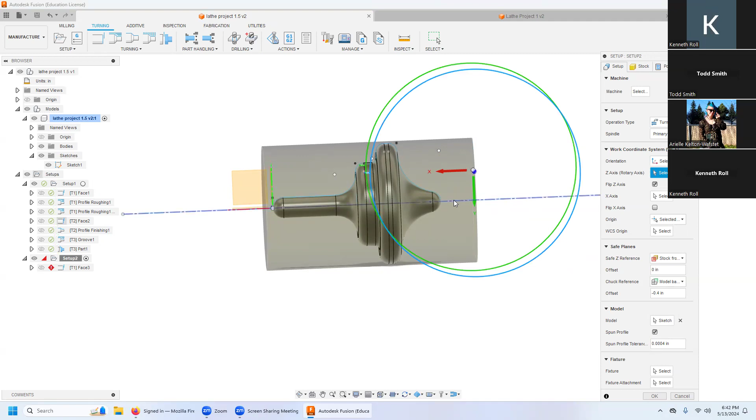Okay, fine. Go back to here. Don't want to flip it. I want to go from selected point, and I'm going to select this point. X-axis is going to be perpendicular or a parallel to that one. And then we're going to flip it. And it is absolutely grumpy.

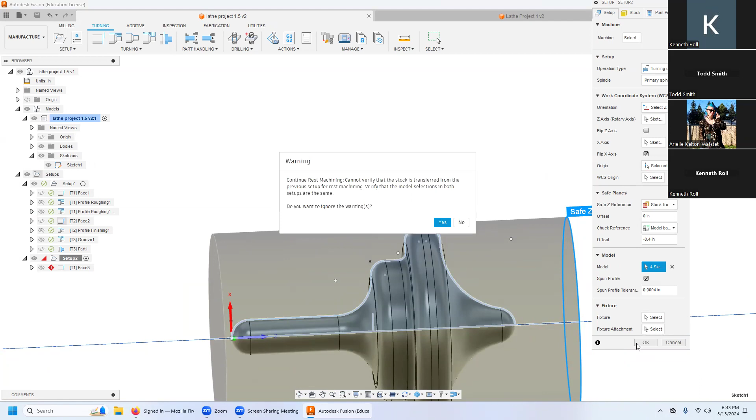Let's try selecting this. So I don't want to do the whole part. I just want to do that. And it is super unhappy with that. It doesn't like something I'm doing in that setup. So let's start over. Why is it being grumpy?

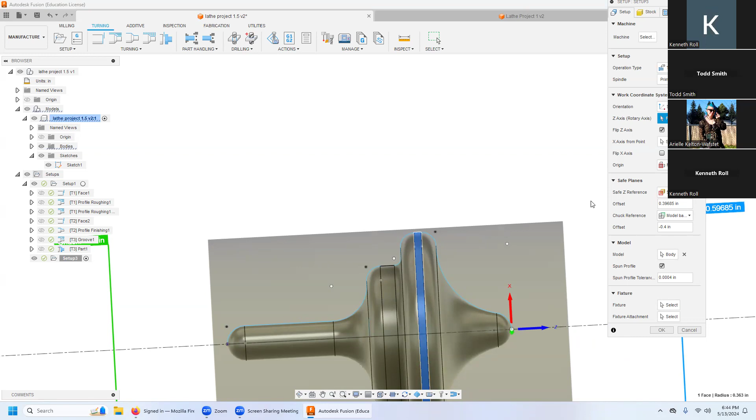Okay. I don't care. Whatever. Go. Okay, now it's happy. I don't know what I did before. I got it right this time. All right. Fine. Whatever. So I'm going to try this again. See, that's going to be happy this time.

So duplicate. Then I grab the second one. Then I drag it down to setup 3. And then I open that up. Then I grab that face. And I'm going to go back into edit. I'm not going to worry that it looks kind of weird. Everything's okay, because then it recalculated. Okay, all that looks fine there. Model front, offset 10 thou. Okay. And drop that down to there because most of that stuff is gone.

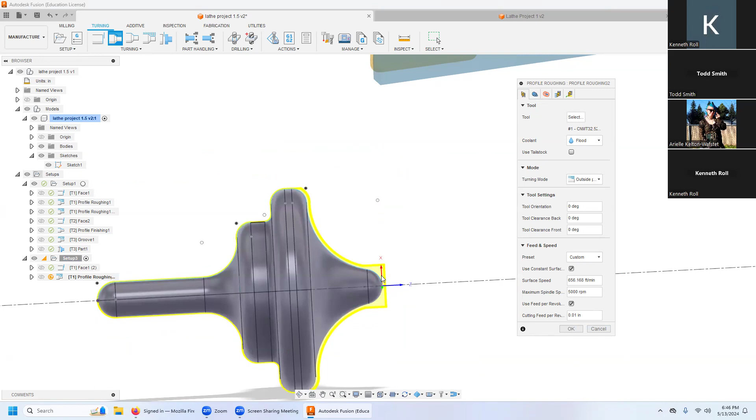Profile roughing. So most of it's just been roughed. We just need to get this little nub in here, right? So we're going to go with geometry, drag this one up to there, and this one out to there. And that should do fine. They're going to leave 10 thou and 10 thou. And let's see what it does before we make changes. I don't want all that. There we go. Much better.

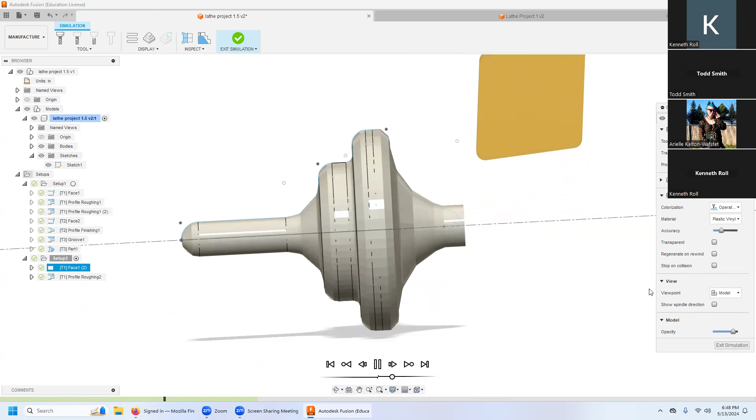Okay. Let's simulate. And it's going to say we're going to crash, but we can ignore that because this disk won't be there. Zoop. Nice. Okay. That's looking groovy. So now I'm going to go back to my, let's see, face 2. Duplicate. Select. Drag. Goes to that blue line there. And then I'm going to right click, edit. And that all looks just fine.

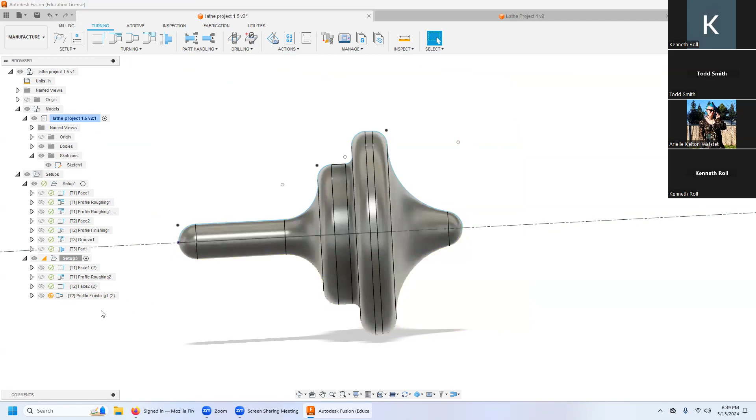And then I'm going to come down here to profile, duplicate. And then, oh, sorry. I'm going to grab it, drag it down to here. Drag that face back up. There we go. That's what I want. I'm going to come in, I'm going to edit. I am going to go to geometry, model, chain, open chain. And it is thinking down here about something. That makes you select. No, you're not. Try again. What are you doing? Drag you back to there.

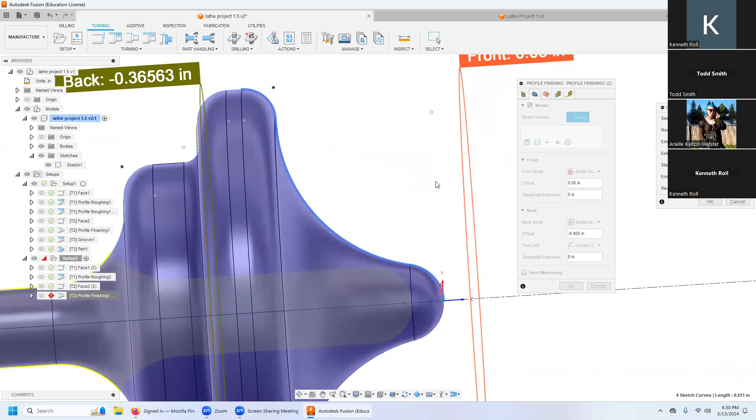And we're going to go into chain, open chain. There we go. I want that to go the other direction. There we go. And there. And there and there. Now, we do not want to continue past. We have already cut this surface here. We don't want to cut over it again. So actually a curved lead out is going to be our friend here. Okay. And so I might even give it a curved lead in as well. Kind of like it.

Make sure there's nothing I need to do here. I think everything's okay. All right. Lead in radius. Let's start out at 1/8 of an inch and see what we think from there. Giving it the same. 100 thou, 80 thou. Oh, let's make that 100 thou as well. There we go. Now that's going to be a problem because our fixturing is going to be right here and we have just crashed. That is what is known in the industry as a bad thing.

So it might be we don't get to have that lovely curve on this. So we may not get as nice of a finish. So I'm going to come back here and say, okay, fine. Let's bring that back to a 0. This one back to a 0.

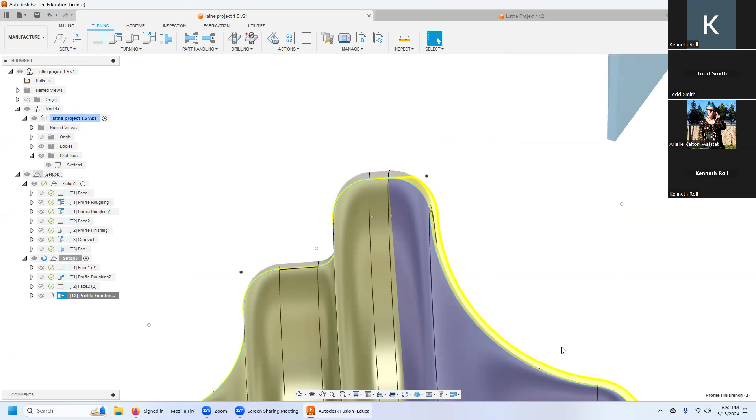Yeah, it's probably going to do better. Now, if we could have our fixturing further back, then we could play with that a little bit more. But it doesn't look like we really get to. So let's grab everything and see what we get. Total time, less than 2 minutes. That is nice. Here we go.

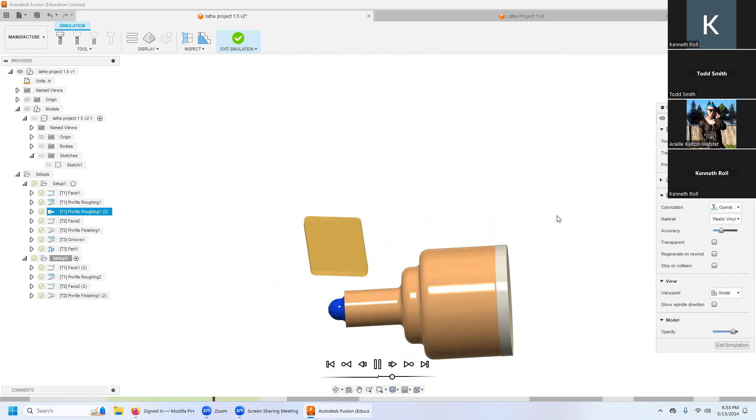Base. Rough. Rough. Rough. Rough. Nubbin. I would probably trim some of that extra dancing around that it does in the post processor, in NC code. And there's no need to warn anyone of that. You're just making the toolpath more efficient. Doesn't hurt a thing.

Now, the danger here is in potentially creating deflection and bending the back part of it. So we end up, what's that? Oh yeah. So we could end up creating problems for our op2, but I think we're going to be okay on this.

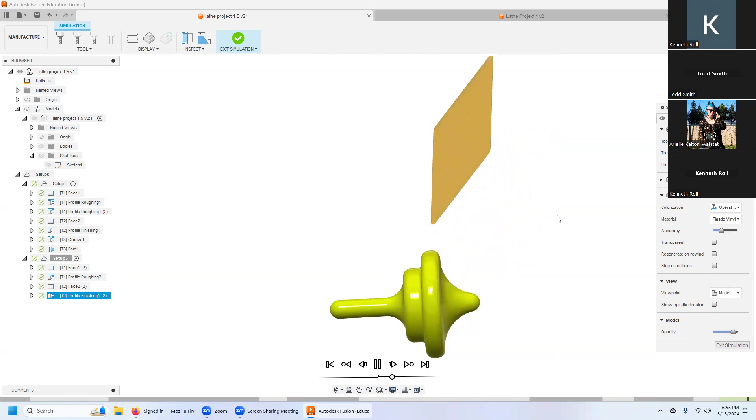So here we go. And a lovely little top that may or may not spin well. Yeah. Okay. So I'm going to save that. It is now in there, available theoretically for you guys to look at, compare, contrast, make your own choices. I might have put in some more notes for the operator for some of those toolpaths. Maybe, maybe not.

But I would like for you guys to try that. You don't have to make the same model. You can do something different if you want. But I would like you to try to make a top of some fashion. Well, if you're not going to cut it, any size doesn't matter. If you do want to cut it, make sure that we have the stock.

And we have a little less than, well, oh, that's right, I need to leave. So we've got about half an hour. So you can take that time to work on it, or you can go home to work on it, whatever brings you joy. Do you guys have any questions for me right now, though? That was a lot, wasn't it? That was a lot. Yeah, quite a bit. Yeah, I gotta digest this for a while.